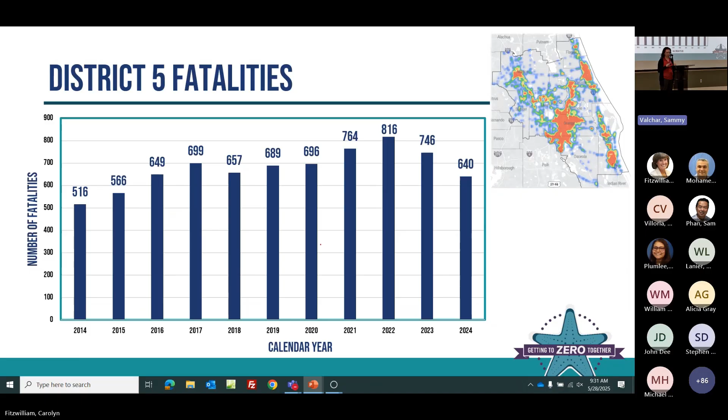Why are we trending in the right direction? I don't know the answer to that. I know there's a lot of really awesome things going on with the department and our partners, whether in our projects, our behaviors, law enforcement, the way we're acting on the road. All of those things are contributing to that number going down, and it's a very positive thing. So we're excited about that.

Did you do that? Okay, thank you, because I did not push anything.

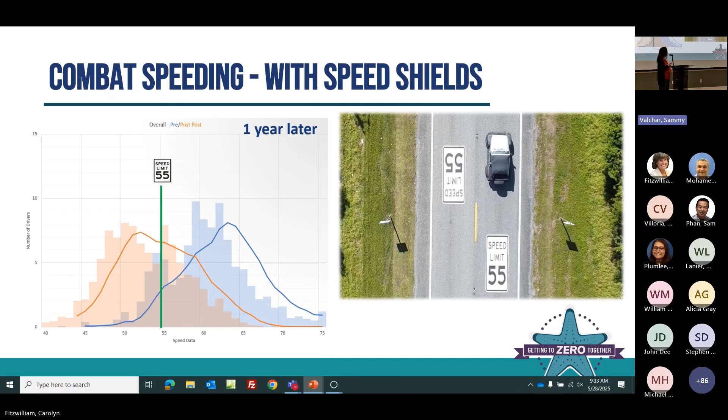So we're going to start deploying this in other places where maybe we can't do infrastructure changes quite yet, but we want people to know, hey, in this area you really need to go 45, 55, whatever it may be. I'm excited to see how we can expand that. They're only about $2,500 to put down, so it's a nice thing to be able to just go out and do.

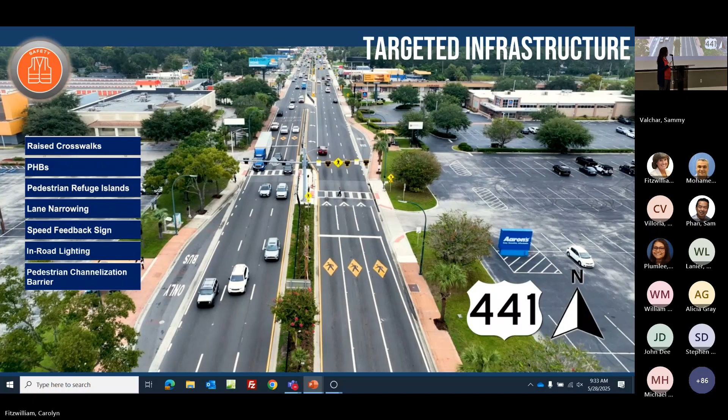So you've seen this project before too—this is the pedestrian project on Orange Blossom Trail. And I'm happy to say that we are still fatality free related to pedestrians in this 1 mile stretch. That's almost 3 years of no fatalities, when we used to see anywhere from 1 to 5 fatalities in this 1 mile stretch. So it's working. I actually got a phone call just yesterday from a gentleman in Louisiana who heard about our project and wants to know about our fencing standards and things like that. So this project is making a difference, not only on that corridor, but across the country.

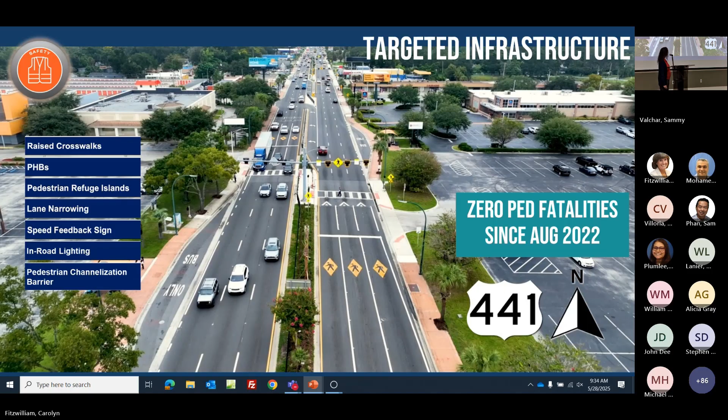So, enhanced collaboration. We've been experiencing some, I don't know, I'll call them uncomfortable things on our projects lately where we've done all the things—talked to the city staff, the county staff, had our public meetings, talked to the elected officials—and then they're still not happy, or they had no idea this project was happening. I could spend the next 4 hours going through various stories. But what it told us was that we need to do more. Typical resurfacing, maybe not so much.

But if we are putting in raised crosswalks, chicanes, bulb outs, any number of things that are changing the geometry, the way people used to drive. The things that I used to be able to fly through, now you've narrowed the lanes and I have to slow down. Yeah, that means it's working, right?

So what we're trying to work on is at every single stage of a project, we are talking to the right people. The elected officials are the ones that get the phone calls like, how did you allow this to happen in our city? So that they understand, hey, this is what we're proposing, this is why we're proposing it, this is why this is a good thing.

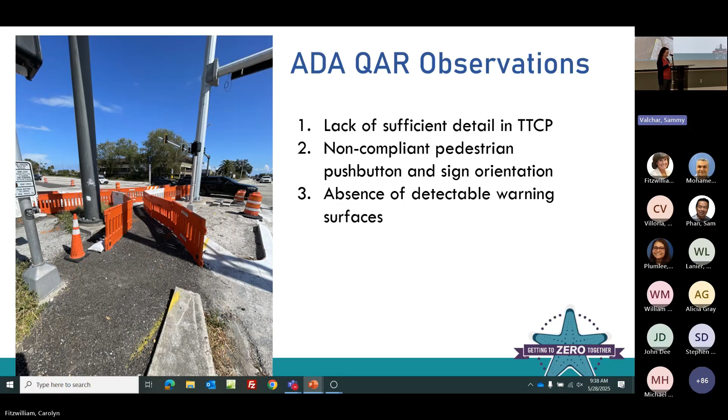We are going to be putting together more of a training on this and things that we have found. So today is really just super high level, making you aware that this happened. We don't have the final QAR yet, but we have seen a draft. And what we were also told from central office is that we're not alone. We're not the only district that they're seeing these things on, but I'm glad that they brought it to our attention so that we can address them.

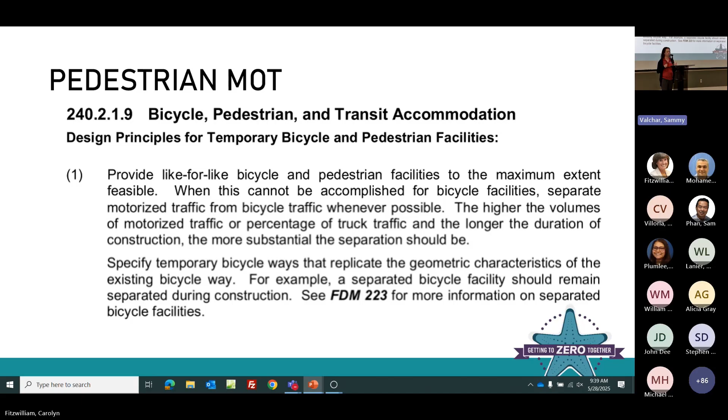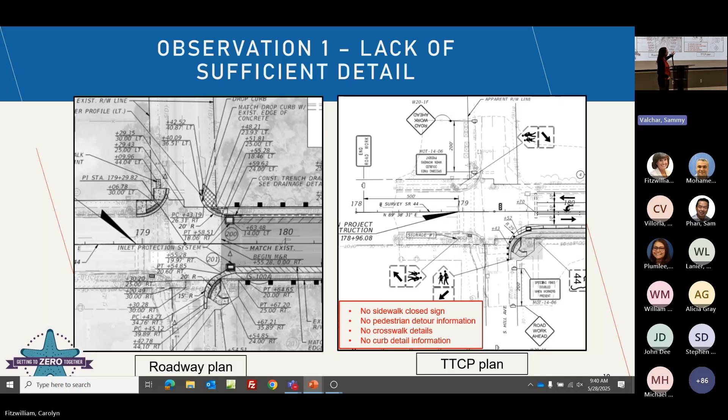Next. Okay, so this first one is an example of a traffic control plan that basically doesn't accommodate pedestrians and bicyclists at all. Just kind of left it up to the contractor to figure it out. We probably needed to provide some detail in these plans.

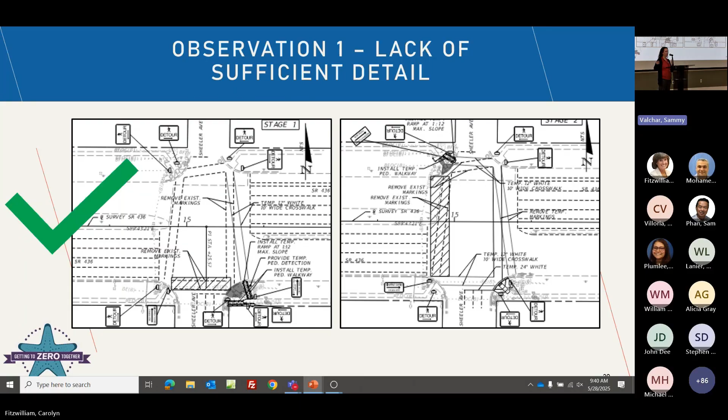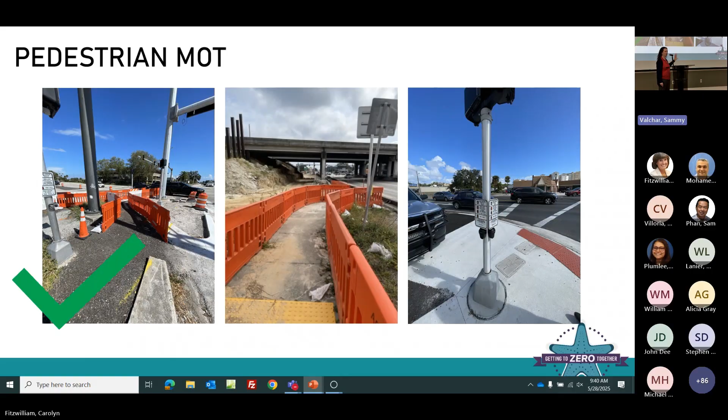So this is just some examples of good MOT in the field. Now, what I don't know is if they had designs to go from and this is how they got there, or if the contractor did this on their own accord, but that's the kind of stuff that we want to see.

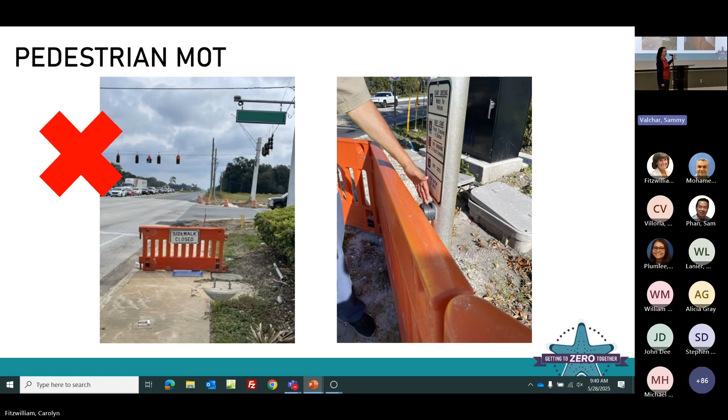This is what we don't want to see. Again, I don't know if the designer had a wall there or not, but these are the types of things that—they can't even get to that button.

So the second thing was the orientation of that push button. It's really hard to see here, but apparently we're telling the contractor where to put that push button and it's not in the right location.

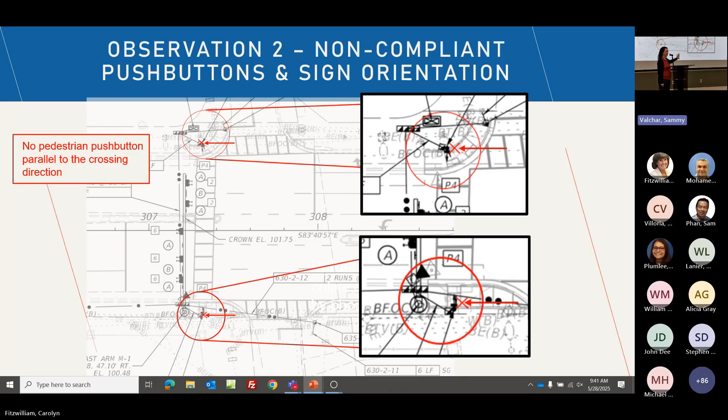This is the standard that tells you where to put that button. So basically, if I want to walk in this direction, then I'm going to push a button right here because that's the direction that I want to go. So again, we're going to be doing training with design, but also construction and CEI about this as well.

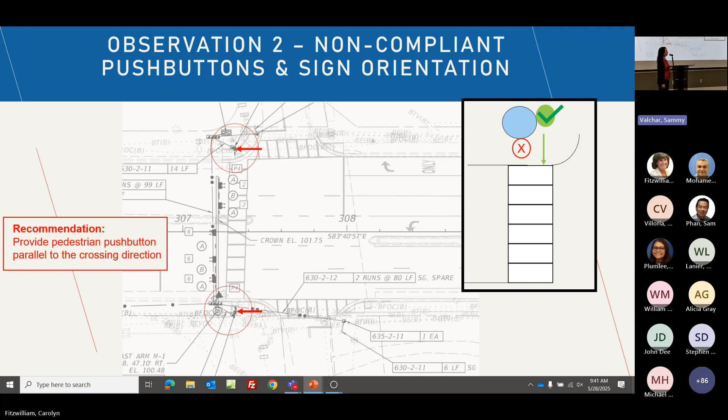So in this example, they did put the push button on the right side of the pole. Okay, the detectable warning surface.

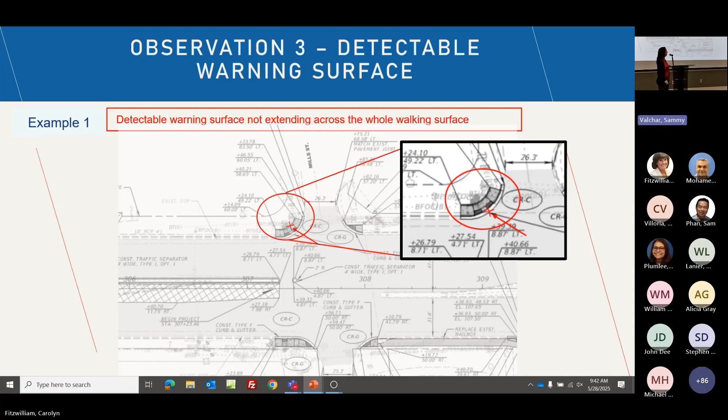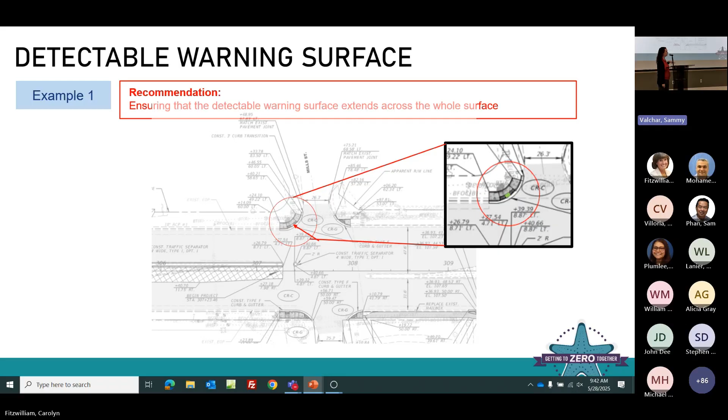Okay, so the Central Florida Safety Summit—anybody in here attend a few weeks ago? Okay, very good, thank you for being there. It was a great event, our second annual Central Florida Safety Summit. We had over 250 people attend at the Daytona International Speedway, representing over 70 different agencies and organizations. And I share that because we have really created this momentum in Central Florida that we're in this together. If we're working together to get to zero, we're going to be more successful than if we're off just kind of doing our own thing.

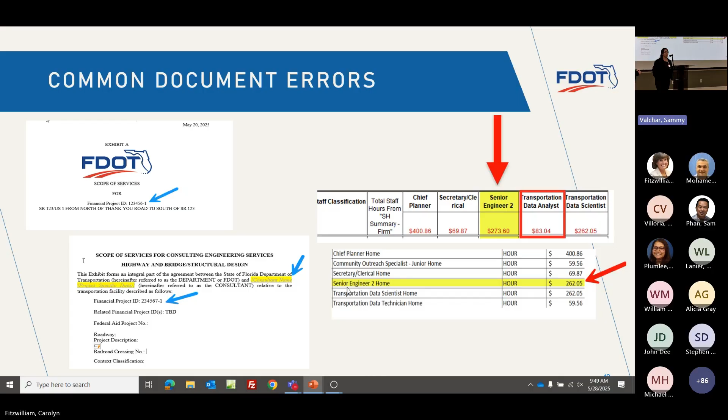And this is just another example. If you look at the arrows, it's just showing that the fee sheet is not properly identified, so we wouldn't know who it belongs to as far as the subs. So again, just pay attention to those details for us.

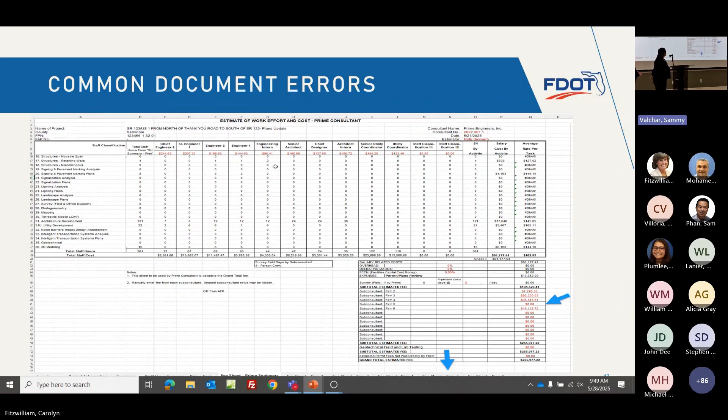Next slide: contract maintenance and ownership. Know what your project budget is. Know when your contract expires and know when your project expires. Sometimes those dates are different if you have a task work order contract.

Invoicing. You guys need to stay up to date on your invoicing. Please make sure you remember the invoicing process: you send it to your PM, once the PM has approved it, then you send it to the contract managers and we approve it in SITs for you. Please make sure that you are following those guidelines, because we will reject them.

And communication. If there's a problem, please reach out to me, reach out to my team. We are there to help you.

And with that being said, this is just a few examples of—recently the district started asking us to recover funds off of old contracts, off of projects that are completed. If I reach out to you, or one of the people on my team reaches out to you, you should be able to tell me how much money you have on your contract and how much money you need to give back. This is an example of a task work order contract. This person knows exactly to the dollar what he can give back to the DOT. You guys should be able to tell us that as well.

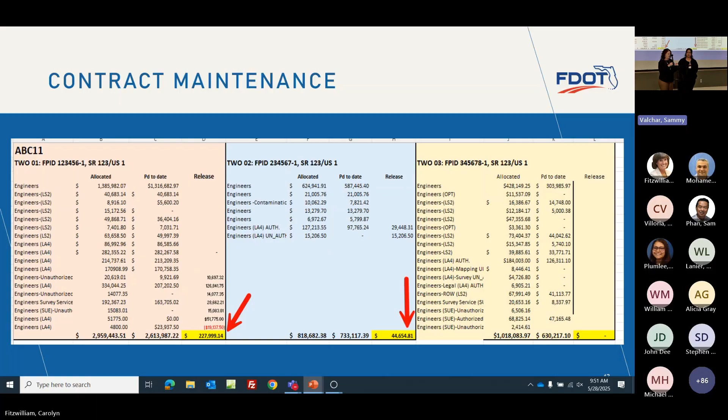This is one of our larger contracts. They also know to the dollar what their contract is, what they're going to bill out, and what I'm going to recover. This is important because PMs move. If you guys move to a new firm, the person coming in behind you should be able to look at this and know. Same with you—if you go to a new firm, you should be able to look at what they've had. So any kind of document like this would be great for you guys to have.

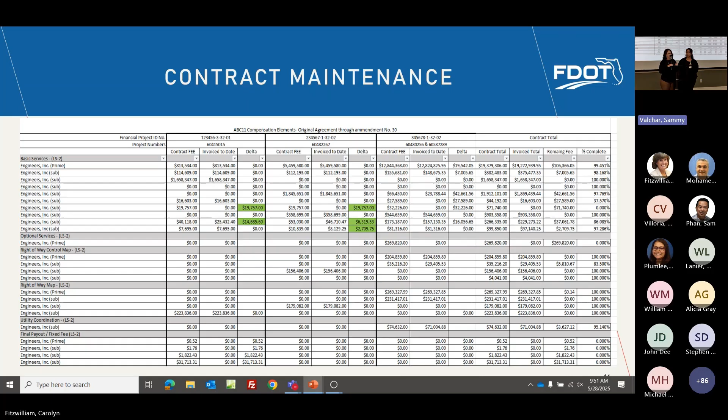So these are just some best practices for negotiations when you are preparing for negotiations. Field reviews are done years in advance, so you just want to make sure that you are informed on what your project actually is. Scope clarification meetings, if needed, you can reach out to your contract manager. If there's any questions that you have or you're unsure about something, just reach out to us and we can make sure that we make that meeting happen beforehand.

Again, document questions, any clarifications, anything that you're unsure about, that's why we're here. Each of you should have a contract manager assigned, so if you have any issues or concerns, you can always reach out to us. Review your scope. You want to make sure that when you are getting ready to come to negotiations that you have reviewed your scope. You know what's going on and you're prepared for any questions or concerns.

And just remember that negotiations are negotiations. We are all there in the same meeting. We do want mutual gains on both sides. We would like the consultants to make money, but we also want to be good stewards of the state. So please remember that it's just a negotiation. You guys are able to talk to each other. That goes for the DOT staff and the consultant staff. Just talk. If you don't understand something, you don't know why they want the hours, just ask. Just have a conversation with them.

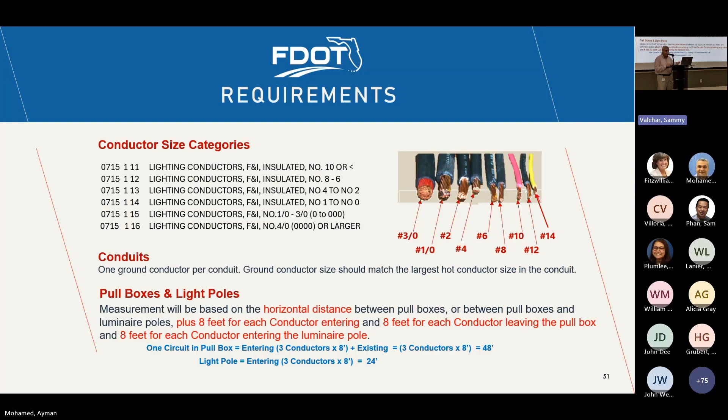Also, when it comes to pull boxes, per the BOE, anytime you're entering or exiting a pull box, you need to provide a slack of 8 feet for each conductor. So if you have one circuit with 3 conductors, you should have 24 slack - 3 multiplied by 8 - entering, and 24 leaving, which totals 48. That's basically the requirement for pull boxes.

So we looked at this and thought about how to come up with a methodology or approach that covers both the conduits and the pull boxes for measuring the slack and the length of the conductors inside them. We separated the conductors to be either in the pull boxes or a pole - a light pole, which is considered a cell - or in a conduit, which should be linear, depending on the length of the conduit.

So in this way, we came up with 2 equations. The first equation is for the cell, which for any circuit is 2 multiplied by 16 - that's 8 and 8, entering and exiting - for the 2 hot wires. Then you add 1 ground wire. And then it comes to the concept of the number of circuit multiplier.

I'm going to talk about the number of circuit multiplier. This is the value that we need to enter to adjust for how many circuits are entering and exiting, because we have multiple options. We could have splitting, ending of the circuits, or different circuits inside the same conduit or inside the pull box. So this is basically the value that we need to input, and we're going to look at this for different configurations.

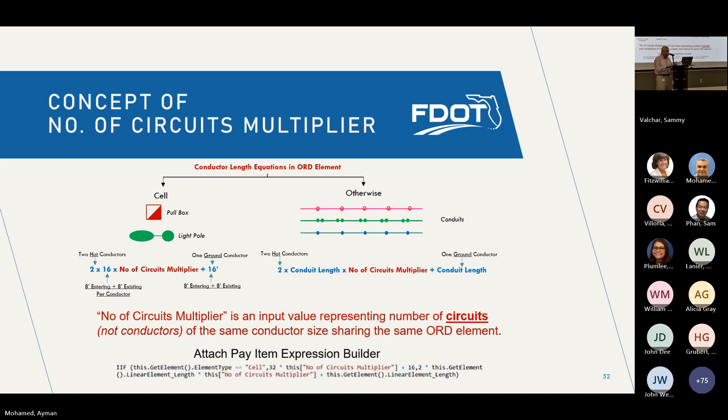So let's talk about the first one, when we have a conduit. The first option is when all the circuits, either 1 or 5 or 6, inside the conduit are the same size. In this case, we put the number as our multiplier as the number of circuits, not the number of wires, but the number of circuits. So if I have 1, put 1. If I have 3, I put 3, if they are the same size.

Now, when it comes to a conduit sharing one large conductor size circuit and a smaller one, the issue is that the ground wire should be on the largest size of your circuit. So if I'm using number 6 for one circuit and number 2 for another circuit, sharing the same conduit or pull box, my ground wire should be with the largest one, which is number 2. In this case, we're going to have these two conditions.

For the smaller size wires, we're going to use 0.5 as a multiplier for the first circuit only. Any additional circuits after this get added to that. So if we have two small circuits, we use 1.5. If it's 3, we use... And then for the larger size, we just use the number of the large size circuits. So if I have one large size, I use 1. If I have 2, I use 2. So this gives me the multiplier, which is going to be an input.

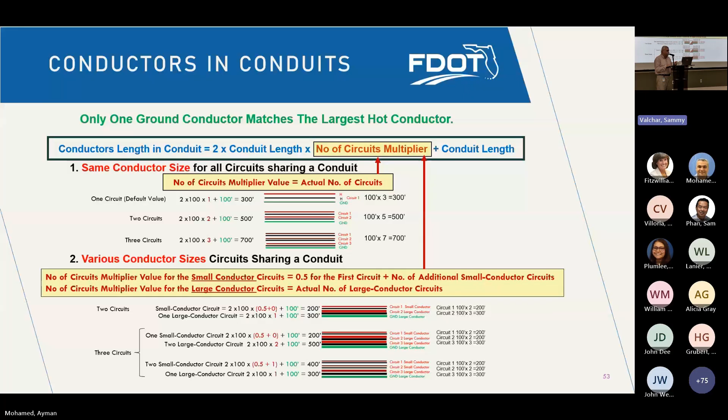Again, this is going to be an input in ORD to use. I'll explain this when it comes to the demonstration. Now, when it comes to a pull box, there are 3 types. The simplest one, which we use the most, is basically when we have a continuous run, meaning the circuit is entering and exiting. So there's 1 entering and 1 exiting. In this case, for same conductor size, we use the actual circuits.

But again, similar to the conduits, we use 0.5 for the first one if it's a smaller one. And then for the larger size, we use the number of circuits for the larger side.

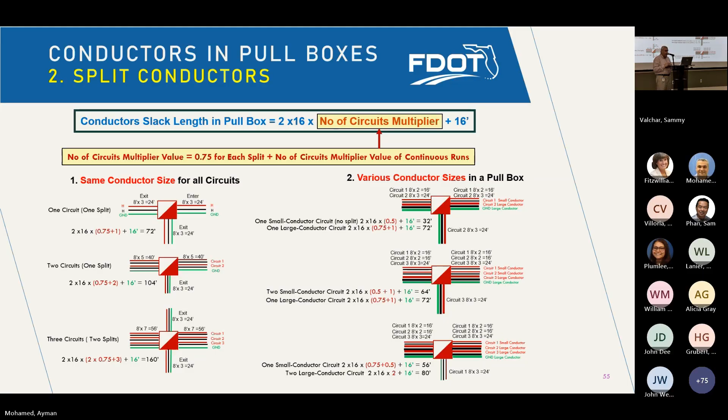When it comes to splitting conductors, basically I'm coming to a pull box with number 2 entering, and then there are 2 exits. So number 2 is splicing there, and it's going to serve an equipment or a light pole in one direction, then moving to the other direction. In this case, we use 0.75 for each split that we have, plus the number of circuits for each one of these.

Then when it comes to begin and end, you use a multiplier of 0.25, because the 0.25 gives you the 24 that you're looking for. So basically that is the multiplier numbers that you need. For light pole, because we only have 24 per box, we always use 0.25 for the multiplier. So this gives me all the multipliers for different configurations.

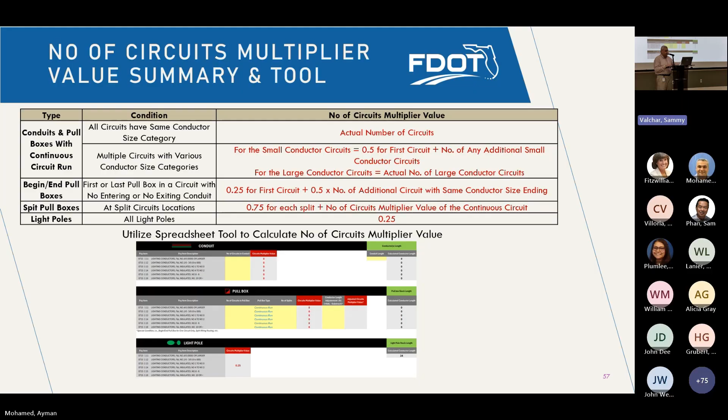So, I know it's a little bit confusing. For this, I created a spreadsheet that can be used for that, and I'm going to demonstrate the spreadsheet that I just talked to you about.

This is a spreadsheet showing basically 3 parts. The first one is conduit, the second one is pull boxes, and the third one is a light pole, which we said is always 0.25, so we don't have to do this. This spreadsheet is giving you what multipliers that you're going to be looking for, and also testing for the lengths that you're looking for.

For example, if I have a conduit that has like a 2 or 3 number 6 circuits entering in a conduit, it's giving me 2. So if I have 100 feet, for example, of conduit, it's going to give me 500, which is 5 wires.

Now, if I have another one for a larger size sharing the same conduit, I'm going to put 1 here. What's going to happen is it's going to create 1 here and then put 0.5 for the first one. So if I have 100 feet of conduit, it's going to give me 300 of the large size, which is 1 ground and 2 hots. And then for the 2 other circuits, it's going to give me 400, which is basically my 2 hots for the first circuit and 2 hots for the other circuit. So that's basically for conduits.

For pull boxes too, I can just look at if I have 2, for example, circuits number 8, basically for number 8 or number 6. And then if it's a continuous run, it's going to give me a 2 multiplier, and it's going to give me an 80 here, which is 40 entering and 40 exiting - 5 wires enter and 5 wires exit.

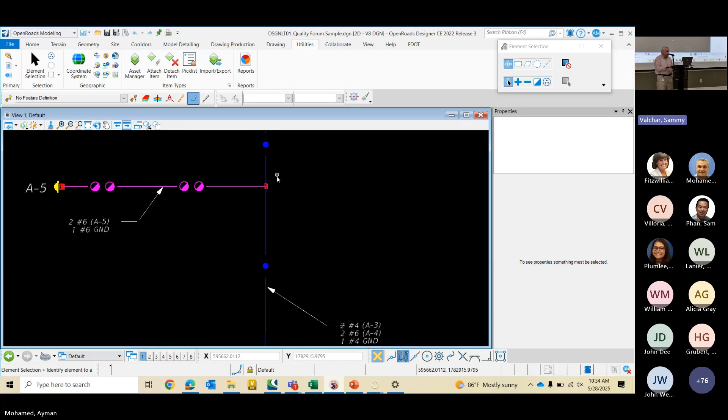Now I'm going to go back again to my ORD and look at this. This is a sample of one project, basically a piece of the sample. And I have a lighting here that is going there, and they have conduits that are basically connecting the lighting at every location. So you have a light pole here, for example, and you have the conduit.

This is considered to be an end - pull box, this is the conduits. And you can click here on the conduit, and you're going to see it does not have any attachment of any wires there. So to do this, I'm going to go to attach item.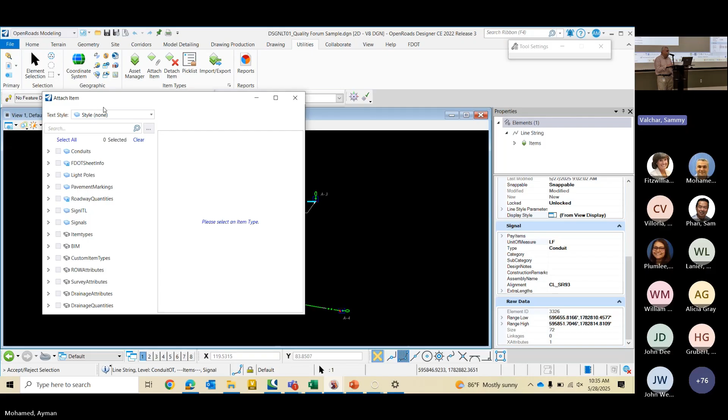And here is the thing - when you go and attach item, you need to put an attach item. If you go and click on this here, it's going to open you a window where you can basically import a library. So you go there, look at the library and import this library, and this library is going to import a DGN file.

I have one template file here that has all of this, so I'm going to be using this template here and say open. It's going to be asking me if I need to overwrite whatever I have. I'm going to skip this because all what I need is my conductors that I created in the template file. So I'm going to be skipping all of these.

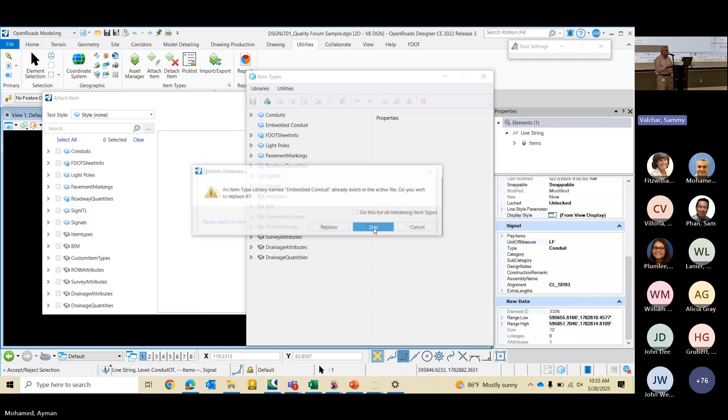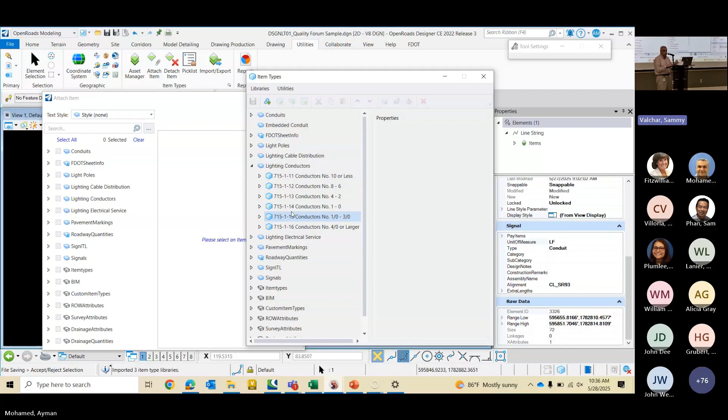All right, you can see now I'm importing from the template my lighting electrical service and my lighting conductors, and here are my lighting conductor types. All of this has the expression that I have, so now I can use any of these to attach it to my conductors, conduits, or pull boxes. If you do it once, you don't have to have this template file anymore, because you can take it from another project and another project by importing from the design file.

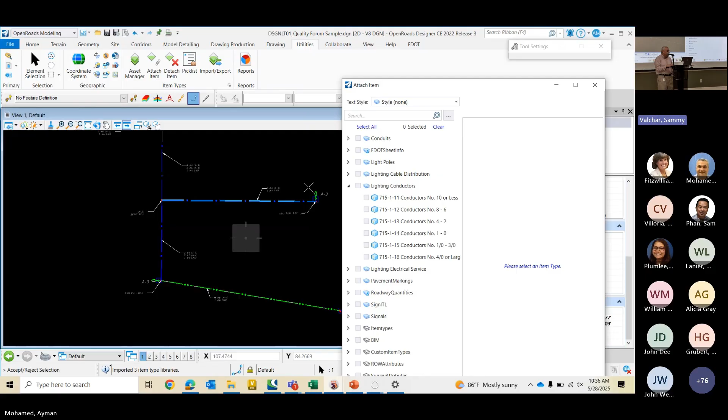When you're doing this, you're going to start basically attaching the item to this conduit that I'm taking here, and you're going to be selecting the lighting conductors. This is, for example, an A3 number 4. I'm going to go to number 4 here, this is an attach, click on this, and then you're going to see here is the pay item attached to it, and here is the multiplier that I mentioned. If I have one circuit, I'm just going to put the multiplier here to be a 1.

Now you can see here, this is 580 feet. The conduit itself, the length of the conduit, is 193, but there is 580 feet of wire for number 2 inside it. All right, I can do the same thing for this one here.

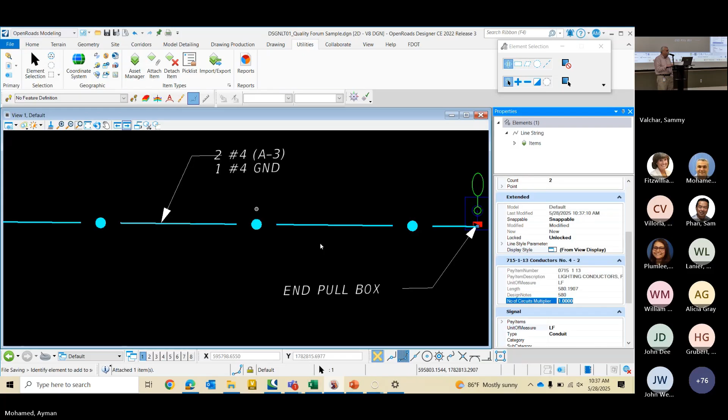I'm just going to give you a sample of this one. So this, for example, I have 2 number 4, 2 number 6, and another 2 number 6, so I have 3 circuits there. One of them is a large size, 2 of them are a smaller size. So if I go here to my Excel sheet, I have 1 large and 2 small, so that's what I have. I have a multiplier of 1 for the large size and 1.5 for the smaller size.

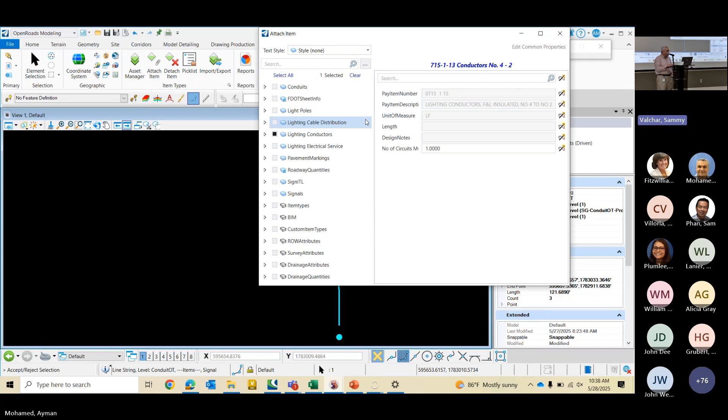So I'm going to go here to attach again, attaching an item here. I'm going to select my conduit and attach item, then select number 4 now, and also get the smaller one, which is 8 to 6, which is the other pay item, and hit OK. Now I'm going to have 2 of them in the property. One is 8 to 6, whose multiplier should be 1.5, and here multiplier should be 1.

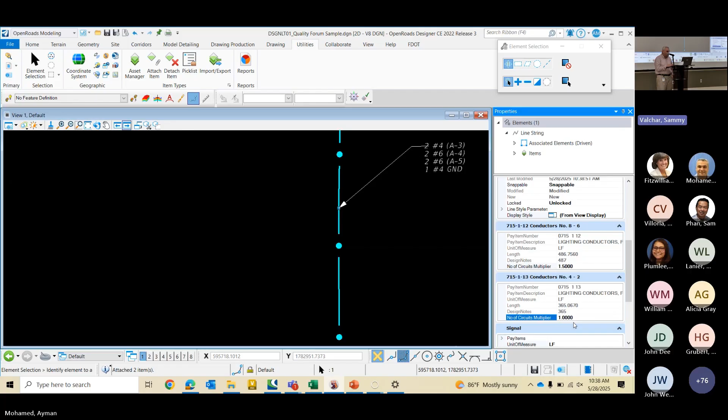So I'm going to go to my Excel sheet and say, okay, I have 1 small one — actually, I don't have any small ones, right? I have only 2 large ones, one is continue and one is split. So I'm going to go to 2 here, I'm just going to delete that and delete that. 1 is going to be a split and 1 is going to be continue, so I'm going to put 1 here. Now it becomes 2.75 at this as 1, so 1 is splitting and 1 is continue. All right, so I got 2.75.

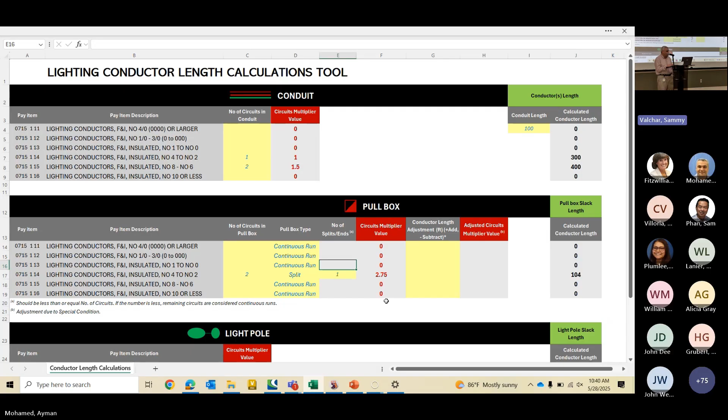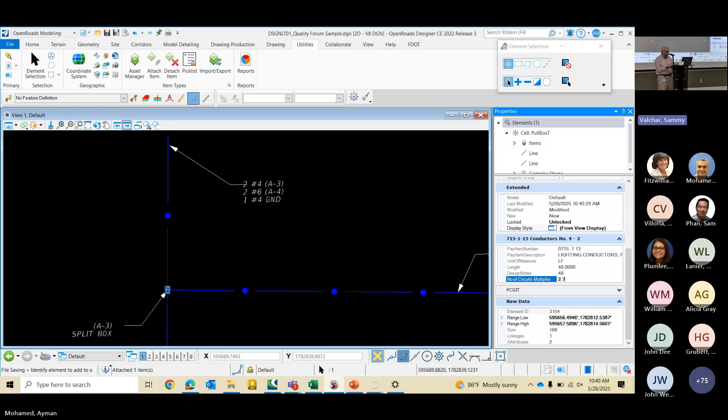So I'm going to go here and attach number 4 to this. I'm going to go to attach item to this one here, and I'm going to take out the 8-6, I'm going to use only the 4-2, and then change my multiplier here to be 2.75.

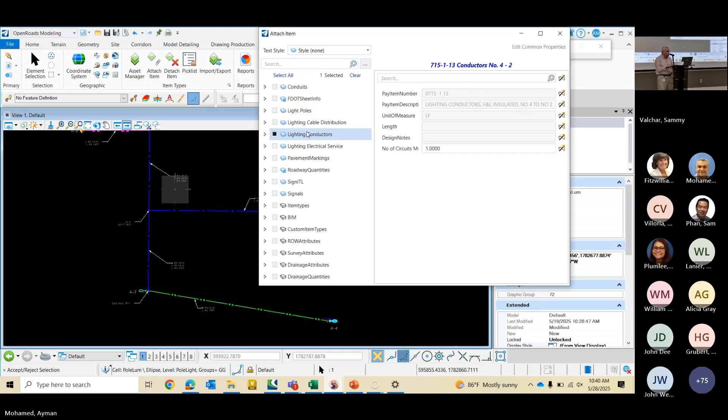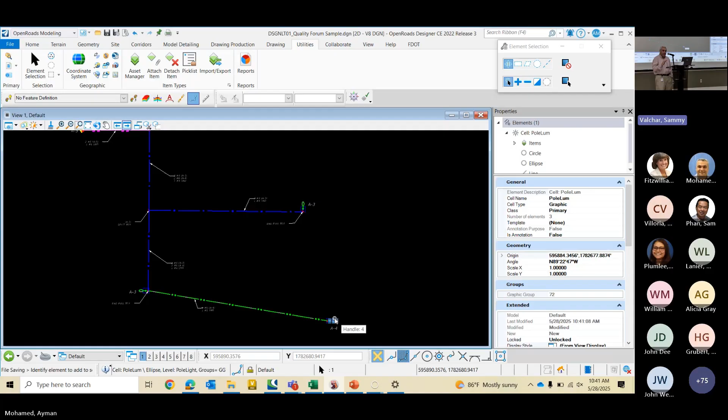This is basically how I'm going to go over it, and it's always attached to it. You can look at what is going to be in each one of these, which is going to be my conductors inside there. So you can test yourself, or somebody doing a QAQC, and looking at it.

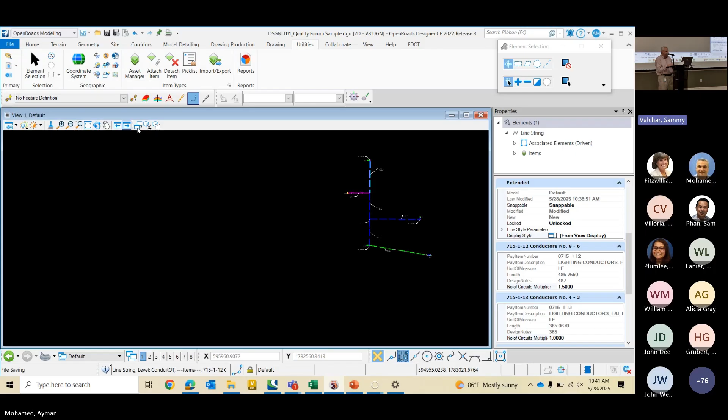Now, after doing all of this, the point is how we're going to be creating the EQR from that. I'm going to open another file that's basically the same file, but I attach everything to it. So now I have attached for every one of these my conductors, and I'm going to go to FDOT and EQ report.

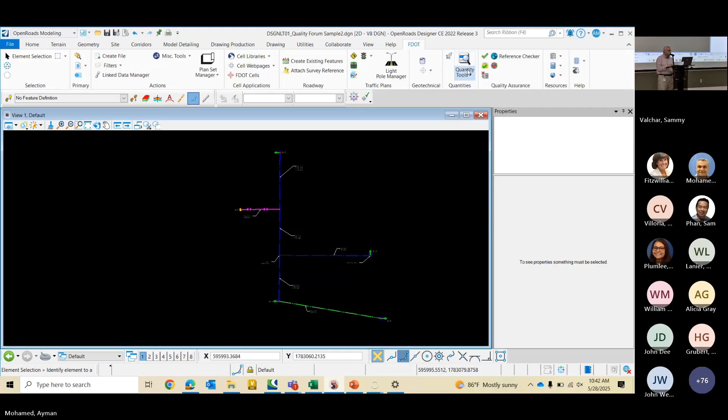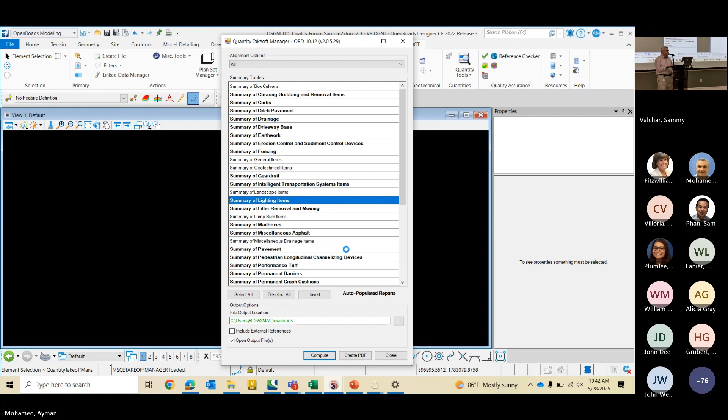I'm going to be selecting lighting, changing, and doing compute. All right, so now you're going to be seeing conductors as a part of this, which is all my length that has been added to this design notes.

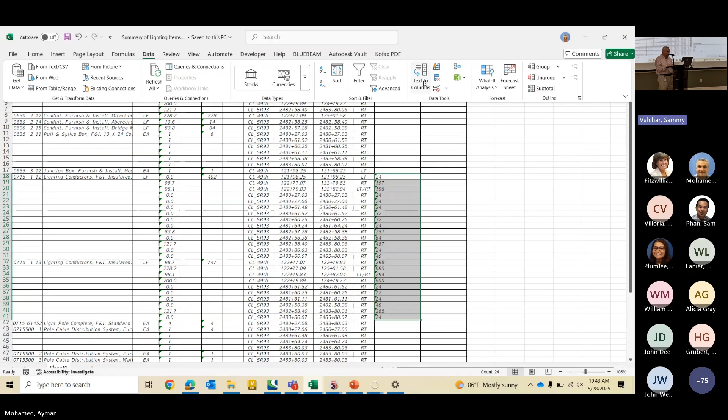So all what I'm going to be doing is selecting this, going to my data here, and then do a text to column. So now it becomes numbers. Next, next, finish. And then I cut this as Control X and I paste it there. And then I can sum for this conductor and sum for this conductor.

All right, so now I can get accurate information. You can see here at this pull box, for example, because it's the same, it's a 24. Here is the conduits, here is another 24 or 32, okay, 40. So these are pull boxes, these are conduits, all right? So that's basically what is the process.

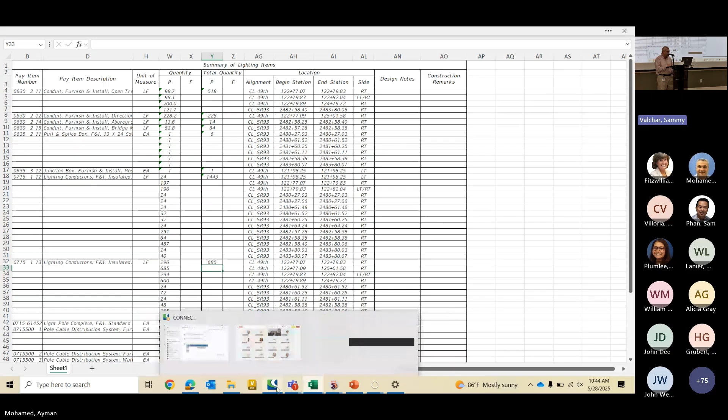And you can do this. Now if I need to go back again and change in the design, for example, if I need to extend or basically change the location for this light pole, for example, you see here this is 200 feet and it has number 2, or 600 feet, which has 3 wires. If I need to change the location or basically do some kind of modification to this and make it smaller.

Now you see it becomes now the length for it is going to be 87, and then the calculation for it becomes now 261, which is basically updated. All right, so now you go back again and do your QA, okay, and get updated information.

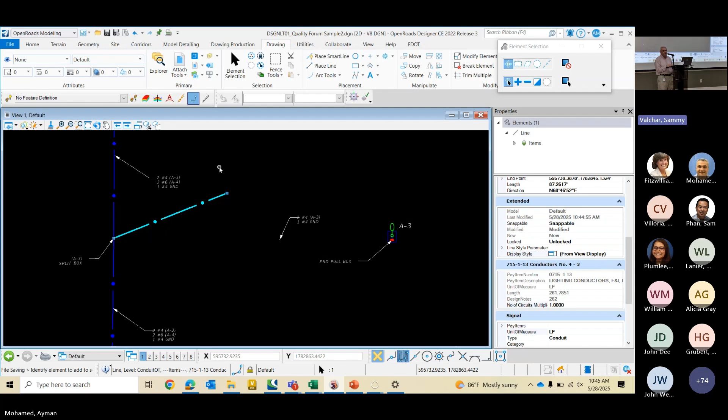All right, so this is basically the best practice that we are using in-house for projects like an interchange. We had like 30 or 40, sometimes 300 poles. We have an I-95 project with like 200 or 300 poles. We use this method to go over the conductors, and you just have to do it once.

Again, if you do it once, you save the file. If you want to go to another file and another project, all what you need to do is attach the reference here. Get rid of this. You go here to tools, attach, sorry, to utility attach item, and then you go to your 3 dots, all right, and then the library, and then import.

You don't have to use a template anymore. You use an old project DGN file that has this. So the template is only a one-time use, okay, and every project afterwards is going to have all of this information. The information also includes the pole distribution. So if you look at this, I added also the transformer pay items, the pole distribution cables for conventional lighting, for high mast, and all of these pay items are already in this template file that you can use. All right, so that's basically what it is.

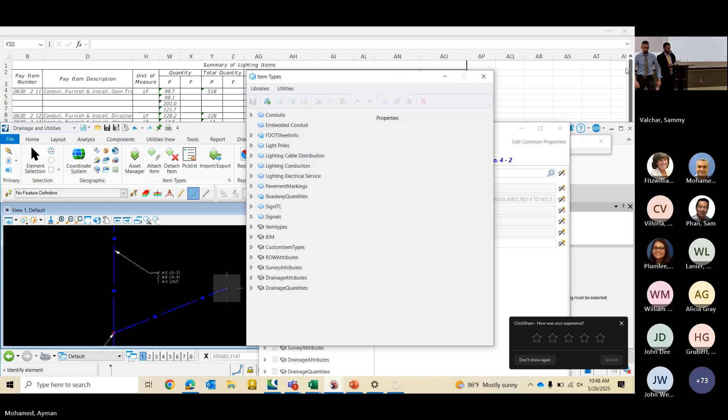Morning, everyone. It's a pleasure to be here. I've seen a few familiar faces out there, but if I haven't met you yet, my name is Wade McLemore. I work for FDOT in Orlando Construction as a construction project administrator and construction project manager.

Just out of curiosity, who here has been involved with the design of a raised crosswalk? More than I thought. Okay. Hopefully this will be helpful and some value to you.

Basically, my hope here today is to go through some experiences that we've had at the resident level as far as issues we've come across, concerns we've come across, and different solutions that we've implemented, and then wrapping it up with the outcome of how those solutions impacted the overall project.

I have worked in Orlando Construction, a highly urbanized area. We've had a number of raised crosswalks that we've installed throughout our roadways. I've been involved as either a PA or a PM in 4 different projects, a total of 14 raised crosswalks that we have installed.

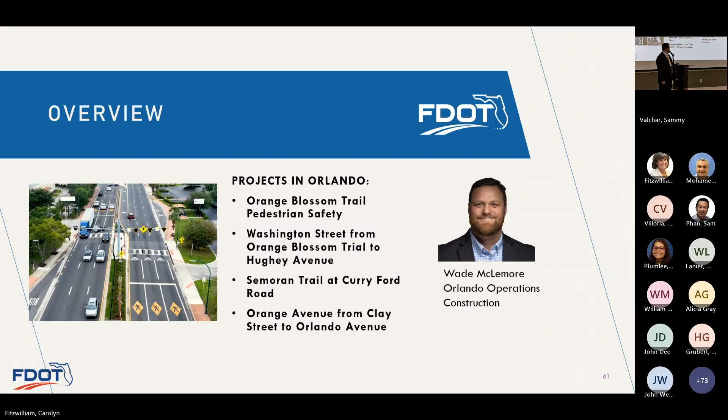So I'm going to get started here with some more information, just to let you know what we've experienced in construction.

These channel curb grates have been a bit of a challenge. We've got a developmental spec out there and it's changing. Something to keep in mind as you're reviewing shop drawings is the ADA compliance when it comes to these grates. You want the grates to be perpendicular to the direction that you cross them. Don't want any wheelchair wheels getting stuck between the groove of the grates. They need to be no more than 1/2 inch wide to avoid that kind of thing.

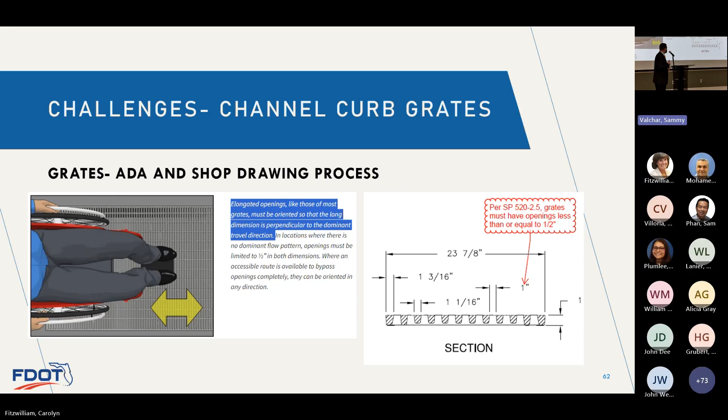Just for your information, I won't spend a whole lot of time on that. The other requirement for the grates, according to the developmental spec, is slip resistance. We had a few challenges with material passing those requirements on one of our projects.

Our contractor's manufacturer submitted 3 different samples to the State Materials Office. The first passed the dry slip coefficient test, but not the wet. So he resubmitted the material, but they coated it, which isn't allowed, so ultimately that was rejected. They finally got it right.

But then when it came down to being able to manufacture it at that point in time, which was a couple years ago, there were procurement issues. It took 12 weeks for that to be made. I wanted to bring that up here because I think it might be helpful to know, sometimes there's a long lead time that some of these materials might have for procurement.

Personally I've had great experiences with just turnaround on shop drawings and that kind of thing. But on the example I'm giving you, installing the grates was one of the last things we did on the project. One of our performance measures is finishing within allowable contract time, so that was important for us to get done within that time to meet that measure.

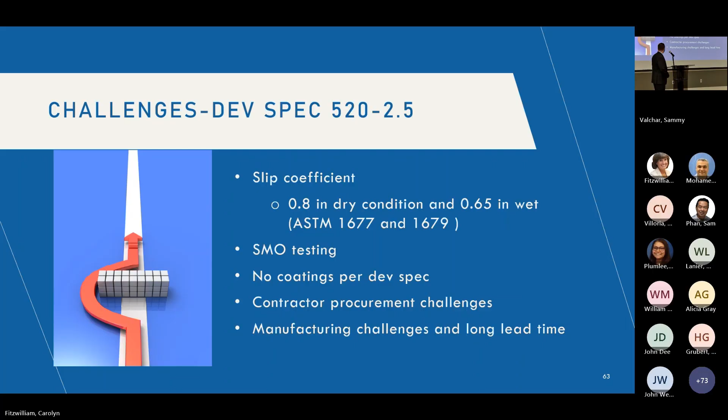All right, now getting into the heart of the presentation here.

One of the most recent projects I've been involved with regarding a raised crosswalk was on Orange Avenue, from Clay Street up to 1792, South Orlando Avenue. It was a situation where we were doing a road diet, so we had 4 lanes going to 2 lanes, one in each direction. Just north of Clay Street, they installed raised crosswalks to give pedestrians a place to cross. Speeding was an issue in this corridor, and we experienced that during construction. A lot of times people were flying down the road there, so something like this was needed, and we did need a better place for pedestrians to cross.

The layout was northbound, southbound, and a pedestrian island in the middle. The contractor paved the northbound side, paved the southbound side, built per plan. The slopes of the ramps were correct. Everything was built the way it should be.

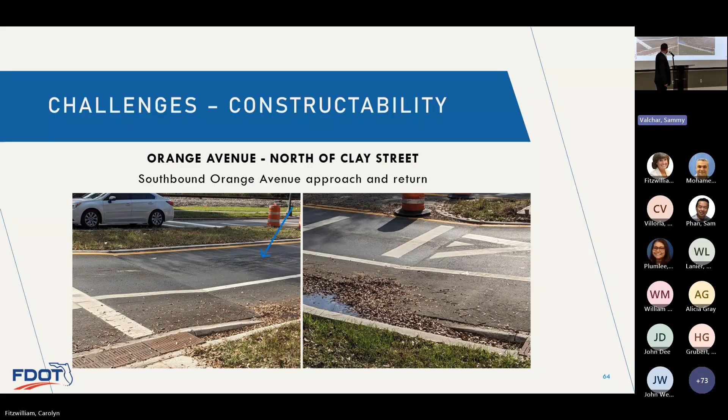So the solution we decided on was to have them go back, mill out a half inch to an inch - just to kind of scar up the southbound side - and repave it all in one lift, 50 feet on each side. They did that, and it was very well received.

I'm not kidding, within an hour we had the news do a segment on it. Trooper Steve was out there, he did a segment on it. Within an hour of us repaving that, they were out there, and it was positive coverage.

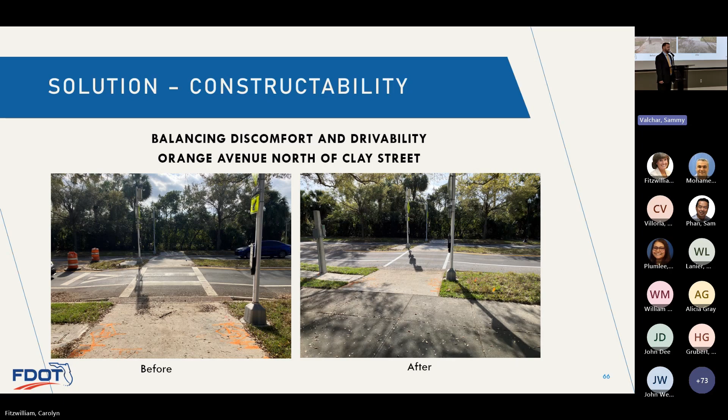So with a speed hump or a raised crosswalk, we need some driver awareness - we need drivers to know there's a speed bump there, but it also needs to be drivable. So we learned that something can be built to plan but not necessarily have the same user experience, the same drivability, if you will - there's a balance there. Our takeaway was that it's the contractor's means and methods on how they construct that, but moving forward, for any raised crosswalks that come across our office, we think it's best practice for them to pave it all in one lift. It's a lot better if they do.

Some other challenges we've had - these are new roadway features. When you talk about raised crosswalks, diverging diamonds, roundabouts, things people aren't necessarily all that used to. I think people are used to speed humps in neighborhoods, things like that, but not so much on state roads. So we experienced challenges from a public relations perspective.

Our community outreach coordinators were great and instrumental in communicating, but still there's challenges because it's a new experience for people who are driving. I mentioned media inquiries and local agencies - they get phone calls. We don't want to surprise anyone, like someone waking up and having a new roadway feature like a raised crosswalk on their commute.

So here are some things we've done to help with that communication. It's a very collaborative approach with PIO, our office, and the local agencies. One thing we did, similar to a pre-work meeting for asphalt paving, was hold a pre-work meeting about 4 weeks prior to when the contractor was expected to install the raised crosswalk. We invited any stakeholder that needed to know what was going on - in the case of Orange Avenue, that was Winter Park, Orwin Manor, the community there, their HOA, and the contractors. We laid out expectations so we didn't surprise anybody when we installed the raised crosswalk.

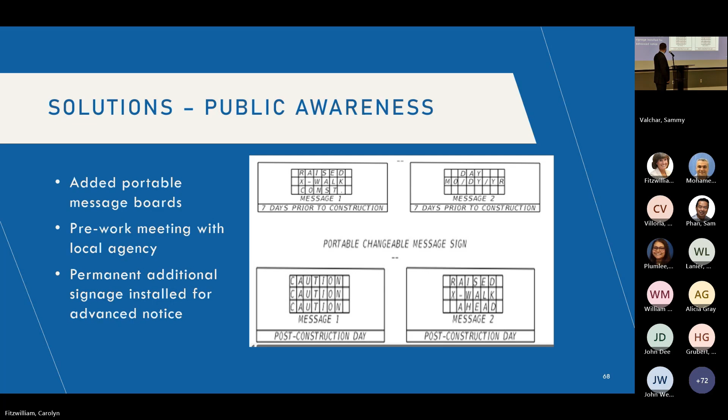So I've sprinkled in some overall feedback and recommendations. But from construction's perspective, I think the most important and beneficial thing is details - the more details you can provide, the better. I mentioned the PCMS boards; some plans had them dedicated, and I think it's best practice to have them on any new roadway feature like a raised crosswalk so folks are aware.

On phasing, I think it's best practice to have raised crosswalks, especially raised intersections, all installed in the same phase. That means adjusting the traffic control plan accordingly and making sure your pay items match what the raised crosswalk needs. We need to overbuild - I think overbuild tables are very helpful. We've had some plans with overbuild tables and others without, so it's important to have the correct pay items assigned accordingly.

I had one more slide, my outcome slide, so I'll just tell you. The outcome here is we've installed 14 raised crosswalks in the Orlando area, and all 14 are still in use. The OBT project, just south of I-4, was one of the deadliest corridors for pedestrian fatalities in the state, and we are achieving target zero. The raised crosswalks are a key component of that, among a bunch of different efforts out there, like the fencing and whatnot, but the raised crosswalks are really helping.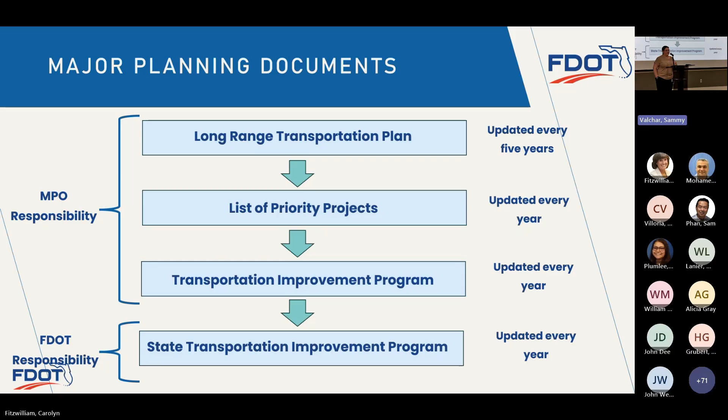Next slide. These documents build off of each other. Each document has different criteria on how to amend it, and the amendment process is based on each of the MPO's public participation plans. We do not control this. This is why it's important, again, is that each MPO is different. Each MPO's public participation plan requires different touch points. And so we need to be cognizant of what's going on, so we don't impact schedules.

So next slide. For the long-range transportation plans, all of the MPOs are processing their LRTPs right now, an update to them. They're working on their 2045 plans. Why is this important to you? Because the more accurate the estimates, those estimates feed into the long-range plan cost feasible plans, and then we can make sure that we're at least close, right?

It helps control those amendments. I get some of the things are out of our control, changes to projects happen - that's why it's a project. But the awareness, again, is important.

So for the LRTP amendment thresholds, there's a website here that I put on this slide, so you can go back to it because it's a little more complicated than what I'm going to say. But design concept or scope changes, adding a new project where phases are currently listed in the cost feasible plan, or a project phase initiation date for a project in the cost feasible is advancing, or there's a new phase.

So the timing of these amendments can take anywhere from 2 to 4 months, because what they have to do is go out to the public and say, hey, we're amending the plan, are you okay with it? Then they have a public comment period, and then they go to their board to adopt. But if they don't meet that one month, then you're pushing out the adoption. So it just depends on the MPO and their schedule and what that looks like. But again, it can take some time, and for planning consistency purposes between each phase, we have to do a check-in with that. If it doesn't meet planning consistency, you can't go to that next phase.

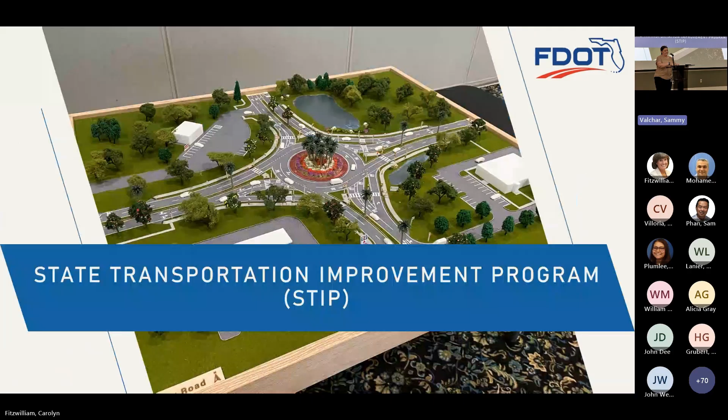So for the STIP, that's the easy one, because if we update the TIP, we're updating the STIP. They have to match, they have to be exact replicas of each other. And we are responsible as FDOT to make sure that this is updated. It's also a living document, updated annually at the same time as the MPO's TIP. And we do have to do modifications or amendments.

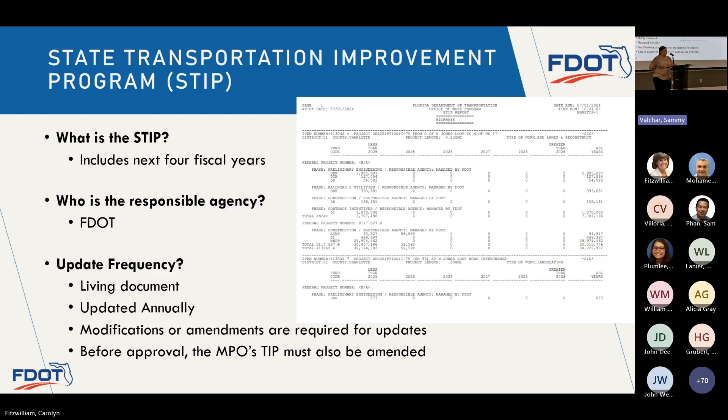So changes to the TIP and STIP. You'll hear us talk about the 2 million and 20%. If your project costs go up by 2 million and 20%, it requires an amendment, the addition of a project or a deletion of a project, and then also a major change in concept. So like changing the project termini by half a mile or 20%, or some major change if you had a DDI at an interchange and now you're doing it to a SPUI or something.

A major change is also kind of reflective into that TIP amendment. And that's where the MPO liaisons don't know necessarily if you're changing your scope, but you communicate with us. That will help that communication to the MPO to initiate that TIP and STIP amendment.

I had put on the slide a couple back the MPO contacts. They're your friends, call them. They're very friendly people, they'll help you out with it. You can call me if you have questions about what the parameters are for doing these amendments, or if you have questions. We've also worked with CPM a lot, so they're very familiar with what's required as well.

So please reach out. For the TIP amendments and the STIP amendments, again, because of MPO board timing, it can go between 1 and 3 months. And so if you have an update to an estimate right before your letting, we might not make it. And that's going back to Director Strose's comments earlier with the performance measures. It's important for this, for y'all to be aware of.

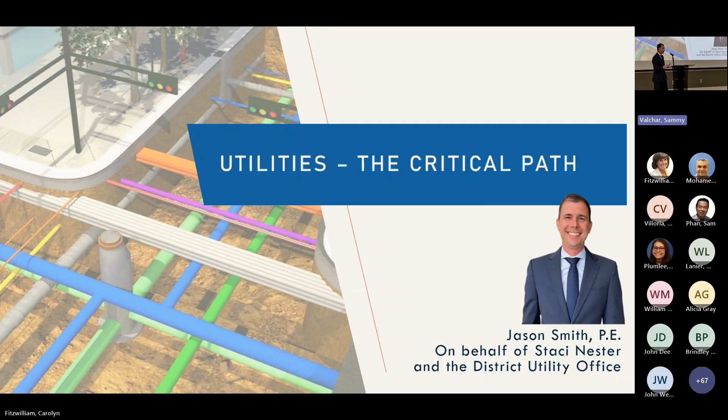The goal for today is really to provide consultant EORs and project managers with some effective strategies for meeting your utility schedules and the requirements associated with that.

We're going to walk through the utility critical path for a typical 3R type of project. We're going to highlight some of the common pitfalls that can delay your progress, and we're also going to share some proactive approaches to help you guys stay ahead of schedule.

We'll figure this out.

As consultant EORs and project managers, we understand that the critical path of our FDOT project schedules has a major impact on the success and failure of the overall project. On most projects, with the exception of maintenance resurfacings, utilities eventually becomes part of that critical path.

Some of the common bottlenecks - what are they? They start with the advanced utility notification. If you have utility work by highway contractor, reimbursements, FGT involvement, it's really important that we get an idea of what that is ahead of time at that advanced utility notification.

Then there's the phase 2 utility contact. You want to have a lot of your SUE done prior to that. You want to have your ERC comments incorporated, particularly the ones related to your utilities, and make sure that your plans and utility conflict matrix are ready to go.

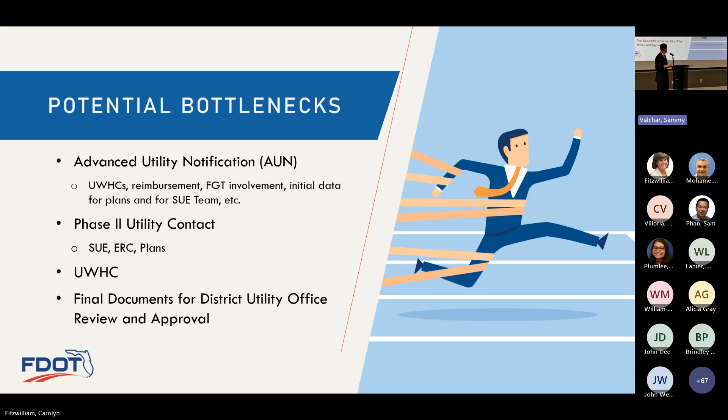More and more often, the district utility office is seeing projects late on their certifications. Ultimately, this can result in misunderstandings and problems during construction. And while the causes for this can vary, there are a few factors that are common between a lot of projects that contribute to these issues.

Delayed start on scheduled activities is the most common issue the district utility office is seeing. Oftentimes there's a sequence of events that has to occur in order to meet the critical deadlines in your master schedule. A common misconception is that your utility coordinator is going to handle all those utility tasks and a last-minute check-in with them right before, say, a utility contact, is going to suffice. The reality is it's a team effort between the EOR and the UC.

A good example of that is really in your phase 2 utility contact. In order for your utility coordinator to meet the schedule for that line item, first you've got to have the initial SUE completed for the project. Then the EOR has to update the plans with the critical comments from phase 2 that could impact utilities, and then update the conflict matrix.

At that point, the UC needs to have time to prepare all the documents based on that updated information. That package then gets submitted to the FDOT utility project manager to do a week-long review of those documents. Following that review, the package has to go back to the EOR and the UC to incorporate those comments. And finally, once all those comments are addressed, the package is ready for utility contact.

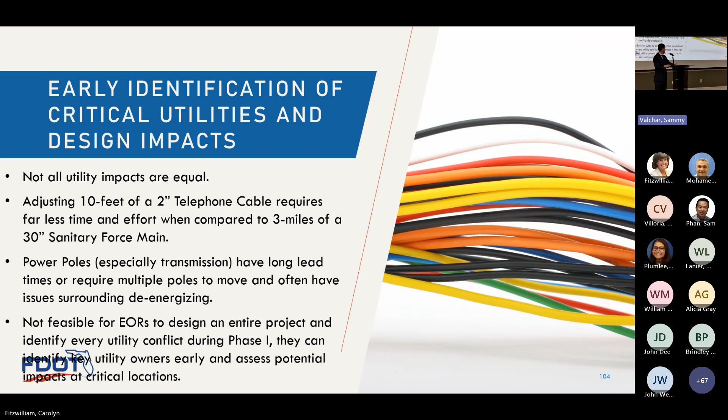Once those key players and the key design elements are identified, then the EOR can work to design around those known constraints and initiate the coordination where we can't. The EOR should coordinate with the UC to determine which UAOs are going to require that early coordination.

For instance, if you're going to facilitate a potential utility work by highway contractor agreement, we kind of have an idea of which utilities are most likely to enter one. So if you have those, we can kind of get ahead of it. If there's a UAO that needs time for procurement of materials or design, we want to make time for that. If they've got reimbursement, easements, if there's FGT involvement.

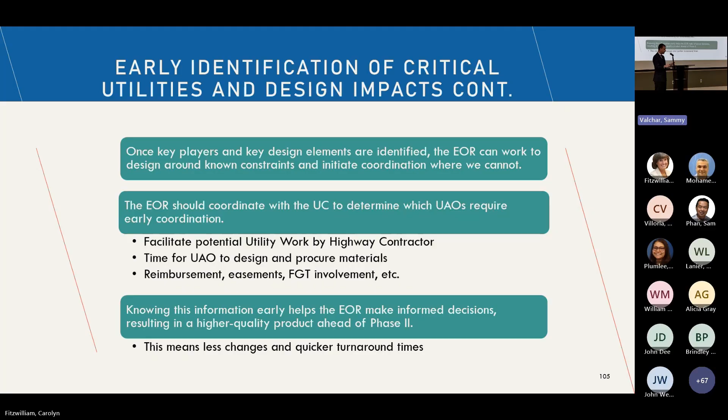Knowing this information early really helps the EOR make informed decisions, which is going to result in higher quality products ahead of that phase 2 submittal. And that's going to mean less changes and quicker turnaround times for all the documents.

Another thing is to schedule your SUE early. Coordinate early with the department if you need approval on, say, mast arms, drainage structures, or any other large critical foundations. It's going to allow the EOR time to include those VVHs before you get to your initial plan submittal.

You don't need to do all of your VVHs prior to your phase 2 submittal. Some are going to be inevitable. For example, if you have smaller foundations like pedestrian poles, they're obviously going to be more subject to relocation due to comments in the ERC.

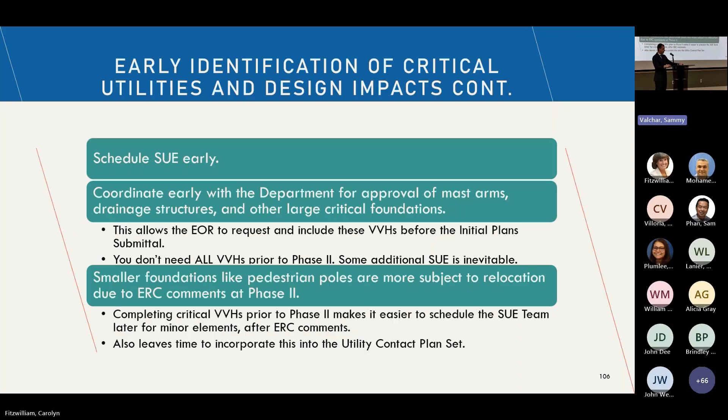Maybe there's a utility that's in the way, and you can make a small adjustment. Completing those critical ones prior to phase 2, though, is going to make it easier to schedule your SUE team for later minor changes due to ERC comments or due to coordination with those utilities. It also leaves time for you to incorporate it into your utility contact plan set.

Focusing in again on that SUE, another issue is that projects are often approaching that phase 2 utility contact without their critical SUE completed. It's very difficult for the UAOs to provide accurate marked plans or UWSs if they don't have designate and locate information on the project.

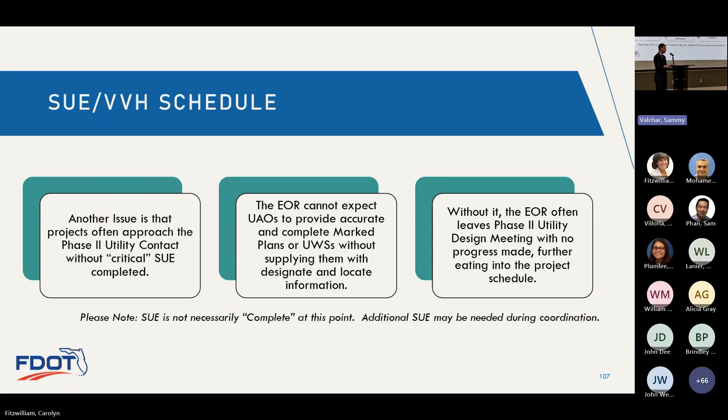Without it, a lot of times as the EOR or project manager, you're going to go into that phase 2 utility design meeting and walk out with really no progress being made, because your utilities are really seeing their conflicts for the first time at the meeting, which is going to further eat into your project schedules.

Keep in mind your SUE team is managing multiple projects and scheduling often books out weeks in advance. The SUE team also has to wait at least 2 full business days after completing their 811 ticket before they can get out there and start digging, even if they don't have anything else going on. It can take longer if the UAOs request more time to mark their facilities.

Once those phase 2 plans go in for review by the department, the EOR and PM should coordinate with the SUE team and pencil in some dates for things like pedestrian poles and smaller foundations, since you're going to need them anyway. You may as well get them on the calendar, and as soon as you have that information, provide it over to them.

That helps get all that information into the utility contact after the phase 2 review is complete. Additional SUE may be needed after the utility design meeting based on coordination with the UAO, so utility locating isn't necessarily done at phase 2 - you just want a lot of that critical stuff done early. This allows adequate time for your SUE team to schedule and deliver additional SUE prior to the utility contact. The approach overall should result in fewer design changes after the utility contact, making it less likely that a recontact at phase 3 is required.

Late changes are also one of the biggest culprits for negative float in your utility schedule. One way to avoid design changes after phase 2 is by obtaining concurrence on those critical design foundations early. If you do have those types of changes occur, make sure you notify your UC as soon as possible. They may be able to provide insight as to what those design changes might actually mean to each UAO.

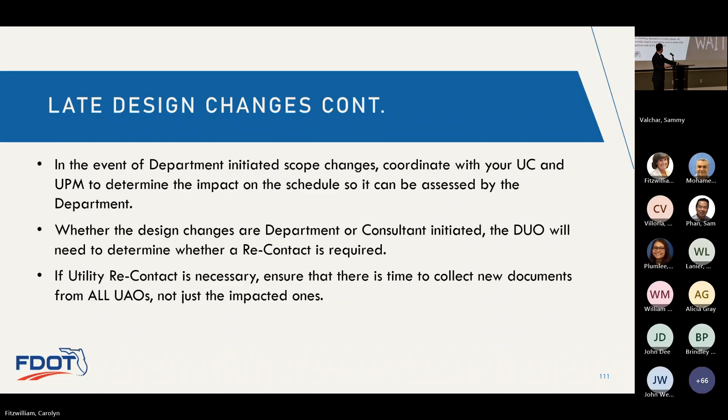Lastly, don't wait for the schedule item to approach before you start submitting documents for review by the district utility office in construction. That process takes time, and they're obviously busy with other things too. So we want to make sure we're not providing them huge lumps of all your utilities at one time - make sure you submit UAO docs for review as soon as you get them.

There might be some exceptions if you've got dependent utilities, say joint use tenants sitting on power lines that are being relocated. Those utility work schedules and mark plans need to be reviewed together because they're dependent upon each other. Make sure you submit your UWS or UIS along with the marked plans - those documents need to go together too, because they're reviewed together.

Not submitting those documents in a timely manner inevitably leads to a sprint to try to obtain those last UAO signatures and get the project certified. I'm sure we've all been there, but if we implement some of these best practices overall, EORs and project managers can better control the critical path and overall meet project schedules.

With that, does anybody have any questions? Thank you.